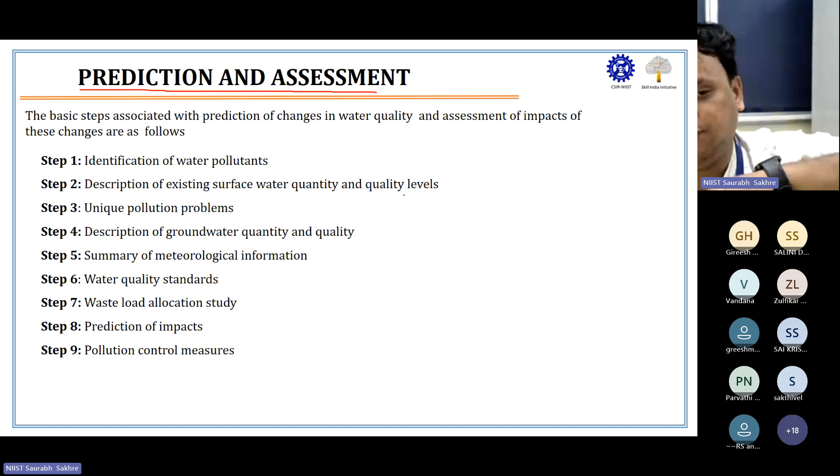We can do some other works also because the field is vast; there will be some other assessments and all. So you can ask me doubts, but what we can fulfill from this course is how much research or how much quantum of work is required to fulfill an EIA, and that is the theme of the course. So you can ask the doubt, you can mention it also, but what to expect from it is how this can be used to fulfill the environmental impact assessment report.

Similarly, like we have seen in air, there will be a series of steps. First, we need to identify the water pollutants, which will be emanated from the particular industry. Then we have to describe the existing surface water quantity and quality levels - if there is some lake or river nearby, we need to describe that. Then if some particular industry is there, we need to share that unique pollution problem also.

Let's say sometimes some e-waste recycling unit is there, so in that particular effluent there will be some metals related to integrated circuits and other things which may not be there in normal domestic wastewater. So like that we have to see.

Then we have to also describe the groundwater quantity and quality which will be required for the project. And in this case also we need to give a summary of meteorological information, because surface water and groundwater both are affected by rainfall in a certain year. So that we need to see.

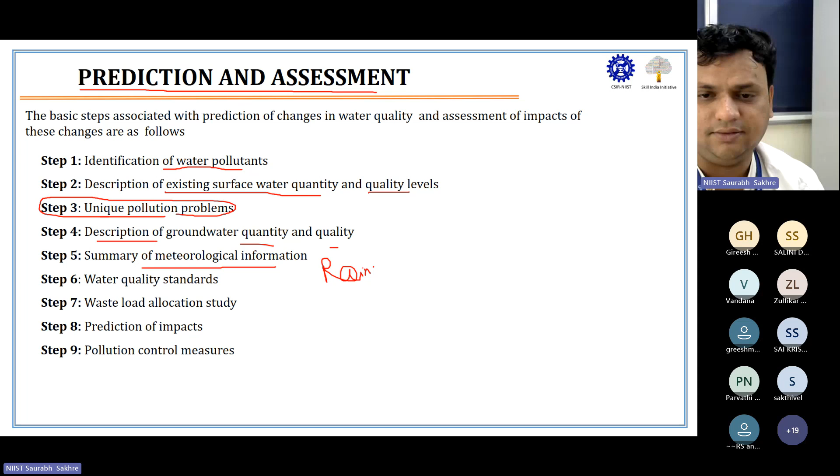Then again, like yesterday, we have to see the water quality standards, because one way or the other we have to compare it with the existing standard. Then once we know how much waste has been generated, we have to see the waste load allocation study. Waste load allocation means if X amount of waste is being generated from the industry, we have to think how much we are going to treat, and from the treated water, how much we are going to discharge in the river and how much we will recycle back. That comes from the waste load allocation study.

And finally, using mathematical models or other types of models, we will do prediction of impacts and give the pollution control measures. So these will be the 8 to 9 steps which we will be following for the water environment while carrying out EIA.

Now, first we'll start with the sources of water when we start any developmental activity. As we all know, broadly there are two sources only: surface water and groundwater. In surface water, we have lake, pond, river, stream, and some storage reservoirs like dam and other things. In groundwater, we have open wells, tube wells, artesian wells, springs, and infiltration galleries.

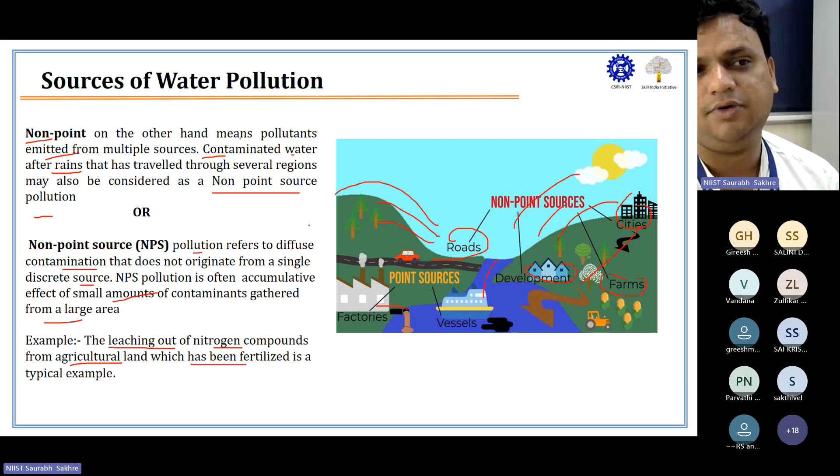One example I've given is that the leaching out of nitrogen compounds from agricultural land which has been fertilized is a typical example of a non-point source. So I hope point pollution sources and non-point pollution sources are clear to you.

Now one thing we need to understand is that unlike air, water has a very different type of pollutant. In air there are pollutants, no doubt, but if you understand 5 to 6 pollutants, you will be able to frame mitigation strategies and management measures. But in case of water, there are different kinds of things because usually it passes through the human body as well as through some kind of process. That's why the number of pollutants in water is more.

We'll start one by one. First one is infectious agents, like bacteria, viruses, protozoa, parasitic worms, etc. The source of this is human and animal waste - when water touches human and animal waste, it will impart infectious agents into the environment.

Second one is oxygen demanding waste. There will be some waste which will demand oxygen in the system, like organic debris and waste plus aerobic bacteria. The source of this is sewage, feedlots, paper mills, food processing, etc. These are some examples, but there are many sources. In typical wastewater engineering, oxygen demanding waste is usually characterized by BOD and COD. So this is the second category of water pollution.

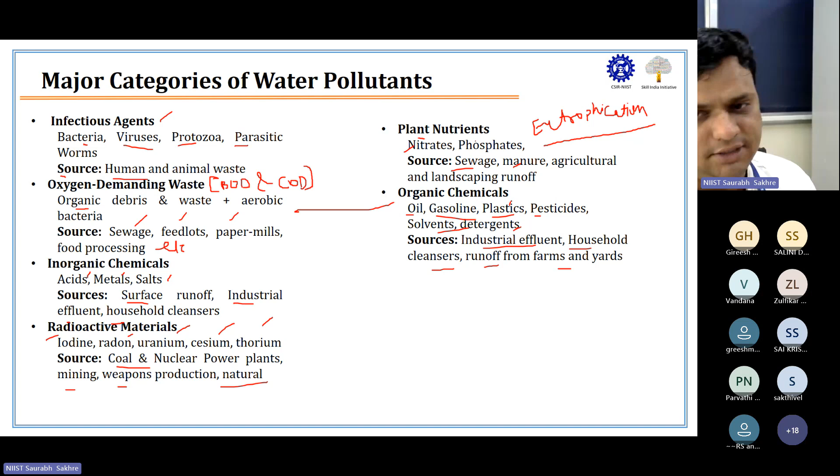Next is organic chemicals. These may also cause some oxygen demand, but differently. Sometimes there will be oils and grease, gasoline, plastics, pesticides, solvents, and detergent. Sources are industrial effluents, household cleansers, and runoff from farms and yards. When I say plastic here, don't assume normal plastic - it's like a polymer of plastic, which is organic in nature. Sometimes there will be eroded sediment from nearby land, like soil and silt, that also contributes to the pollution load in the river.

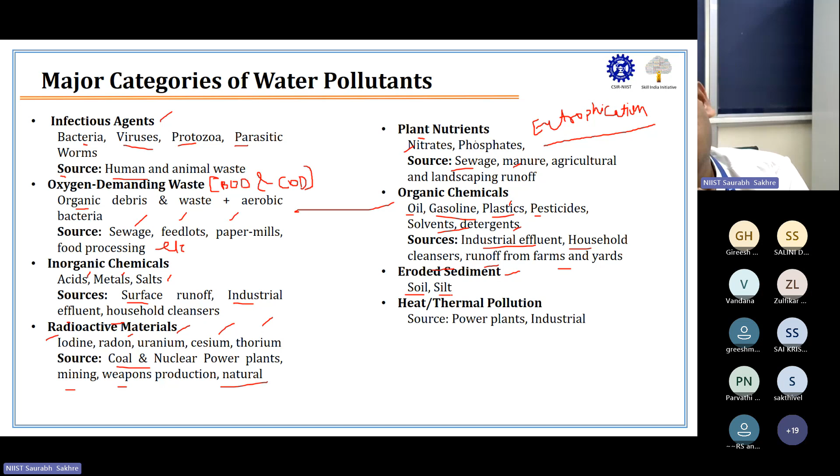Finally, there's heat and thermal pollution. We know that water, to be used properly, should have a temperature equal to the ambient temperature - cold in winter, hot in summer. But often, when a thermal power plant or processing industry nearby uses water in their cooling towers, the water they discharge has a temperature higher than the normal river. When they discharge that water into the nearby water body, it becomes difficult for aquatic life to sustain because of the increase in temperature and other pollution. That's why heat and thermal pollution is also a category of pollution, with sources being power plants and industries.

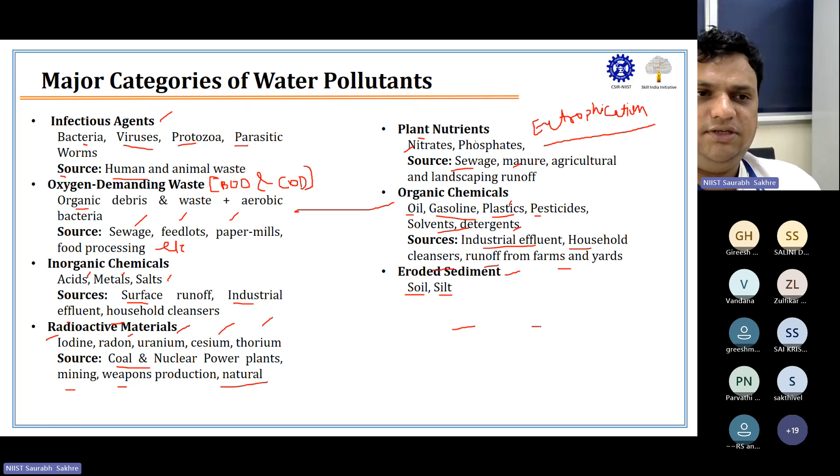So I hope all the categories of water pollution are crystal clear to you.

Now, when we say we have to generate baseline data for water, what exactly do we have to do? We'll see this one by one. First, we need to see the sources of water from where the industry will take their requirement and utilization, and how they will utilize it.

Second, we need to do a detailed water balance. Water balance means - let's say this is the industry, requiring X amount of water, and there are processes 1, 2, 3, 4. We need to see how much water each process requires - X1, X2, X3 - and then finally the output Y. So we need to see the detailed water balance of how much water each process requires.

Then we need to do the breakup of water requirement as per different activities. We have to say that process 1 requires X1 amount of water, process 2 requires X2 amount, process 3 requires X3, and so on.

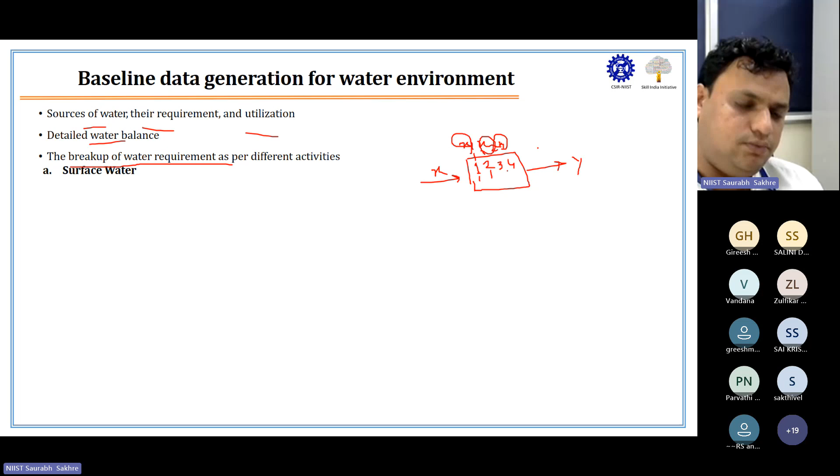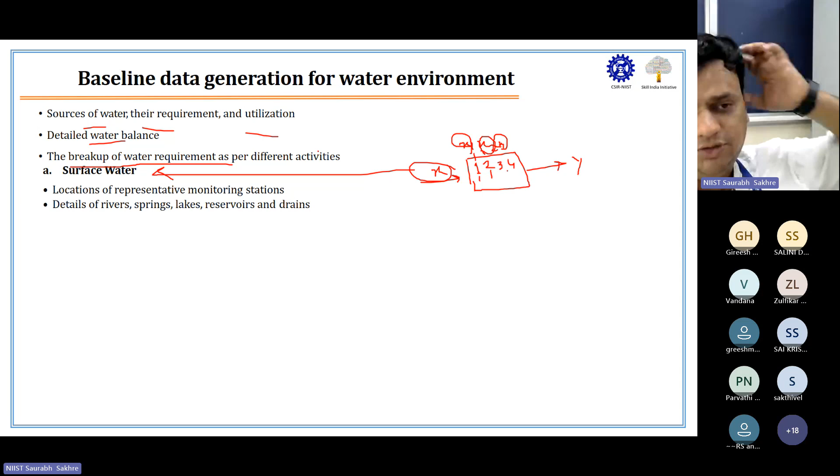Now that was one part. Out of that total X amount of water required, we also need to see how much is to be taken from surface water and how much from groundwater. If we are taking from surface water, we should know the locations of representative monitoring stations where we will monitor, and details of rivers, springs, lakes, reservoirs, and drains in the area - all those details we should know.

Then analysis of water quality parameters to assess water quality. At the same time, we need to delineate the watersheds and water drainage pattern so we can find out how the water will flow during heavy rainfall. Then surface water balance is also sometimes needed.

And we should also know the lean season flow of the nala from where water is drawn. Lean season flow is, when there is no rainfall, there will be some minimum flow - that is called lean season flow, from where the water is drawn.

Then if we need to take groundwater, we should see what the potential for groundwater is, how we will recharge it, and we should also do groundwater budgeting. At the same time, we should see the hydrogeology and aquifer characteristics of the area. Then again, we should see groundwater quality, groundwater potential, and groundwater table in the area - if the table is too low, we have to depend on surface water.

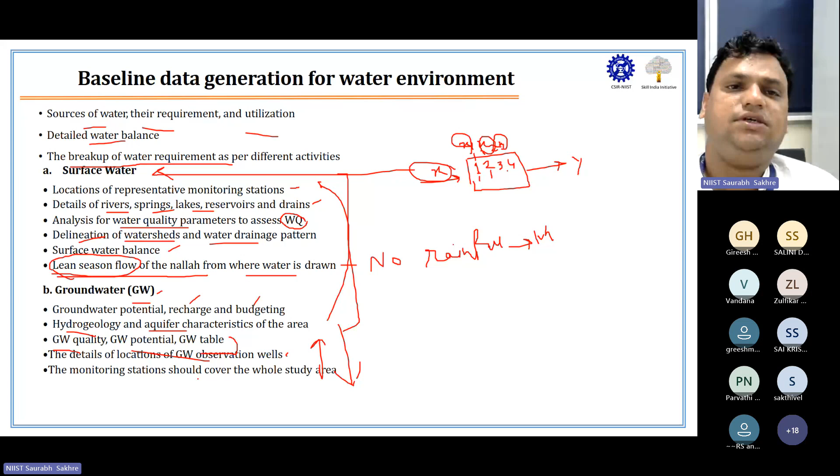If the table is high, I will balance some of the part from groundwater. So collectively, I have to use it. And of course, the details of the location of groundwater observation wells and the monitoring stations, whatever we are giving, should cover the whole study area. So these things we will see when we are generating baseline data.

Now, when we come to the quality of the water, we need to see what is our intent. If you are giving consultancy to some industry, or if you are preparing an EIA report for industry, you should know what is the intent of your treated water after treatment or whatever measures you are giving. Whether you would like to directly discharge into the river, or you want to use it for drinking, or for irrigation or anything. So for different sets of use, there are different pollutants which we should see.

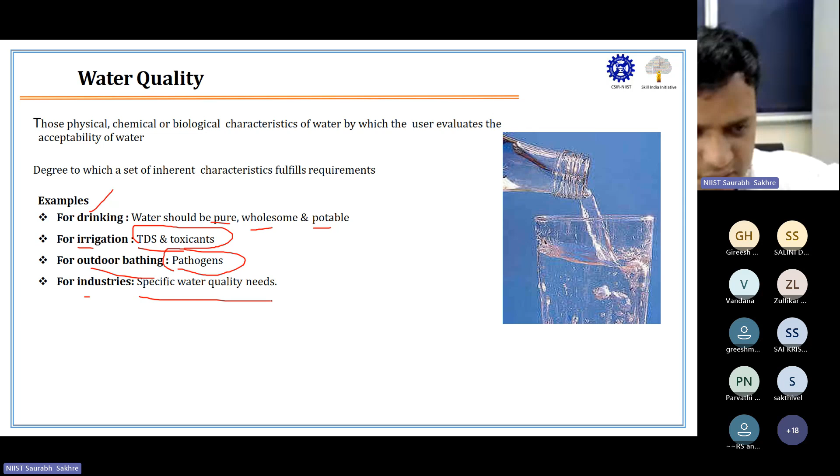Suppose you want to take the water for drinking, then water should be pure, wholesome, and potable. There is no doubt in that. If you want to use that water for irrigation, then TDS and toxicants should be in limit, total dissolved solids and toxicants. If you want to use it for outdoor bathing, then pathogens should not be there. Otherwise, taking a bath in it will lead to diseases. And if you are trying to supply it to industry, there will be some specific water quality needs, which we need to see.

Now, all those things I have shown you in the previous slide can be divided into these 4 or 5 things. First, particles, gases, organics, some ions, negatively charged or positively charged, and bacteria. So basically, all the contaminants in water can be characterized into these classes: particles, gases, organics, ions, and bacteria. So when you are preparing an EIA report, you have to separately say what you will do for the particles, gases, organics, ions, and bacteria.

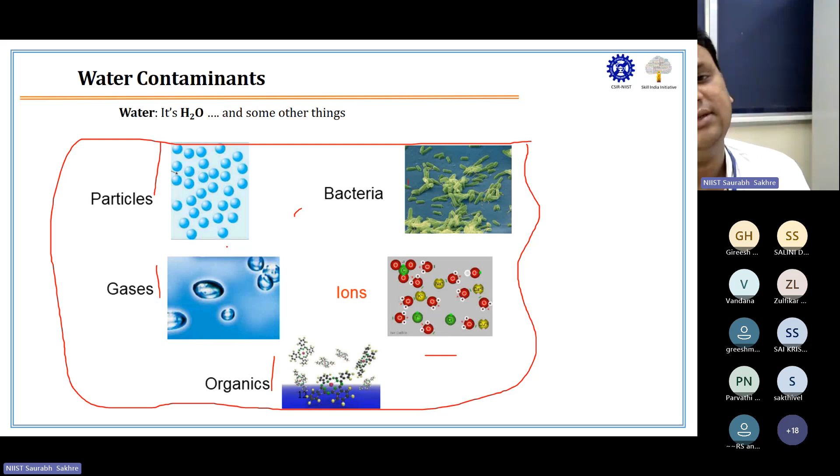And based on the type of industry, it is not necessary that gases and ions will be there. If there is no human involvement, bacteria may also not be there. But if human involvement is there, urination, defecation, all these things, then bacteria may also be there. So like that, you have to judge and see.

Now, when you do water analysis, we need to keep some important things in mind, some key factors. The first thing is that sampling should be proper. Then selection of parameters should be proper. At the same time, in doing all this, precision and accuracy have to be maintained. If you are taking a sample from one place to another, you have to do preservation also, and you have to report the values in proper form.

And at the same time, when you first take the sample, proper labeling has to be done, because many times you will do everything correct, but the labeling is wrong. So you are mentioning a particular water quality for a wrong sampling location. So when you are doing water quality analysis, you have to keep all these things in mind.

Now we'll see what a sample is and what types of samples we can take. When we hear this word sample, what comes to our mind? A sample is a part of the whole that can be examined to see what the rest is like. Suppose this is a river of length L. I cannot take the whole river for my analysis. So I will collect some water samples only. Let's say this is S1, S2, S3 and S4. These are called samples. A portion of the whole is called a sample. And sampling is to collect a small portion representing the water body, or a segment of the water body.

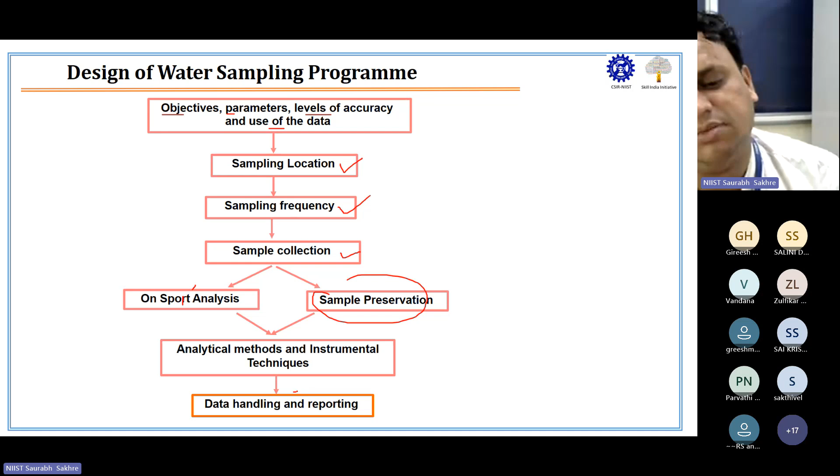Then analytical methods and instrumental techniques, what all are there we use. And lastly, data handling and reporting. So this is a proper water sampling program. When you are framing it, you have to see all these points one by one. Okay. Now we will see some of the important parameters which usually everyone sees in water quality modeling and monitoring, especially when you are doing EIA.

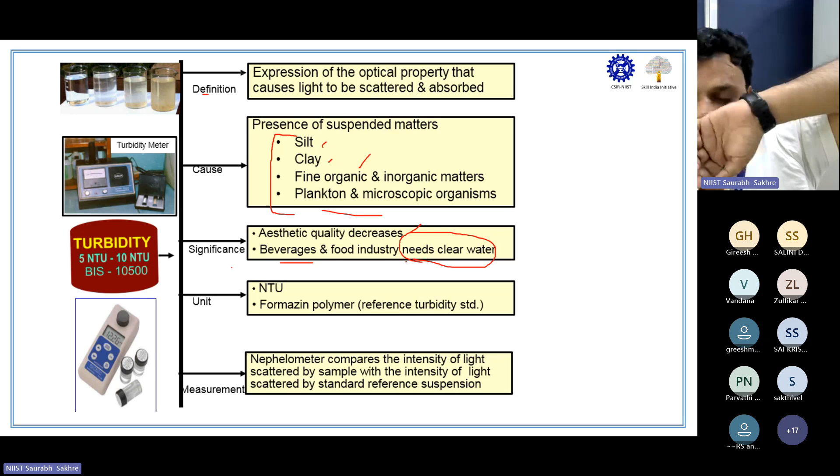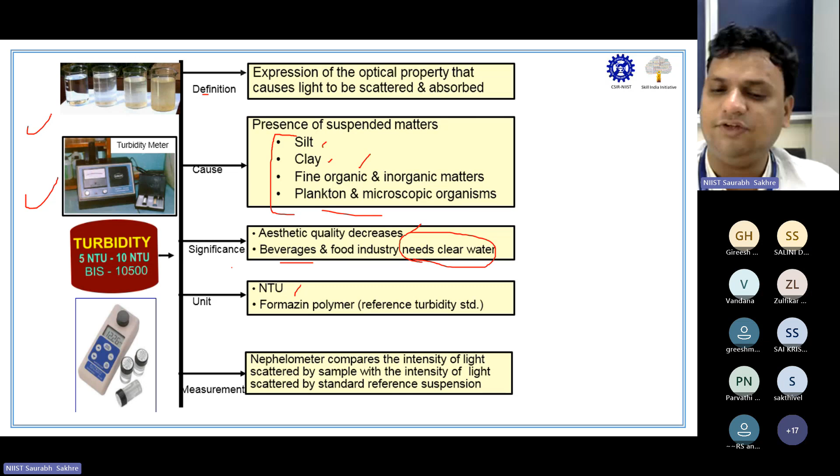Why it is important? Because it decreases the aesthetic quality of the water. And also, if you are selling this in a beverage or food industry, clear water is the only requirement. Okay. And we measure it in NTUs, nephelometric turbidity units, and Formazin polymer is used as a reference turbidity standard. There are some nephelometers which we use to find out the turbidity.

Second one is DO. It is called dissolved oxygen. And why it is required? Because dissolved oxygen is critical for survival of aquatic plants and animals. Okay. What is important is that it should be between 5 to 6 ppm. If it is not like that, then it will not be sufficient for most species. If it is less than 3 ppm, then it will be stressful to most aquatic species. And if it is less than 2 ppm, it will be fatal, sometimes deadly also. So some dissolved oxygen should always be there in the surface water.

Now, what are the factors affecting DO? Like plants and animal respiration, right? Decomposition of waste. If the waste is decomposed, it will require oxygen and it will suck it from the water. Then only it will decompose. That's why we say that don't discharge wastewater in the rivers. Then fresh water holds more oxygen than salt water, that we always know. And cold water holds more oxygen than warm water. Also, the greater the atmospheric pressure, the more will be the dissolved oxygen, because it will mix that. Okay, these are the factors which affect dissolved oxygen in a river system.

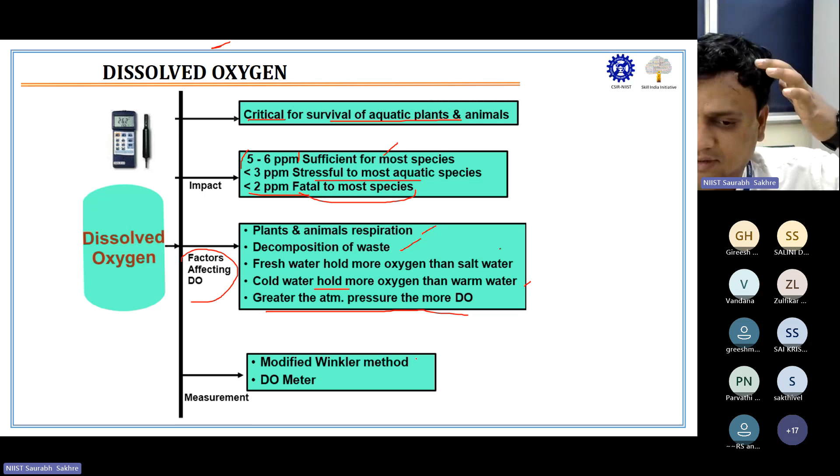Now, how do we do it? As far as the titration is concerned, the modified Winkler method is there. And nowadays probes are also there, sensor based probes which will measure the dissolved oxygen. But anyway, still till date, many scientists and academicians use the modified Winkler method because they consider it to be highly specific and accurate.

Second one is BOD. I already told you BOD is what? Biochemical oxygen demand. Okay, biochemical oxygen demand. So what is BOD? It is a bioassay test. It is a bio.

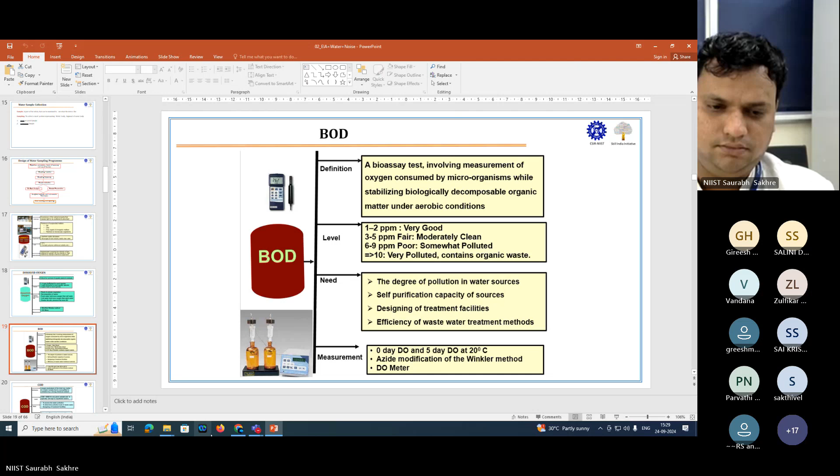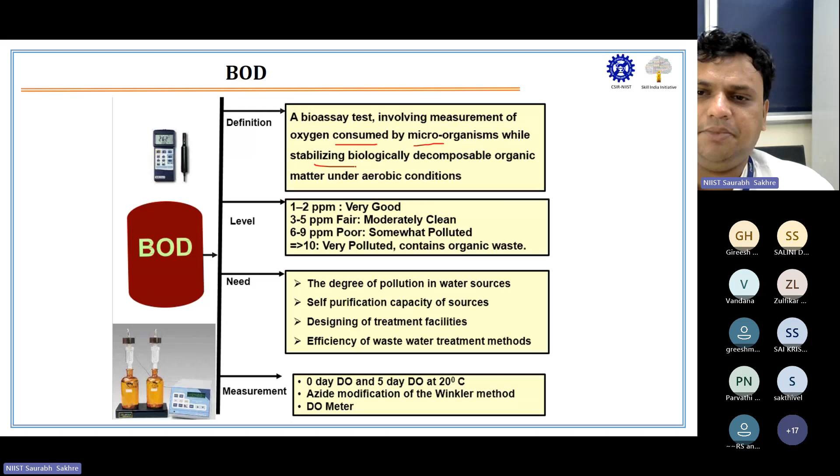So it is a bioassay test. It is a bioassay test involving measurement of oxygen consumed by microorganisms while stabilizing biologically decomposable organic matter under aerobic condition. So suppose some particular mass of waste is there in the river system, it will require oxygen to degrade and stabilize this biological matter. And when it requires oxygen, it will take from the river itself. So that oxygen demand is known as biochemical oxygen demand.

If the BOD is only between 1 to 2 ppm, it is very good. If it is 3 to 5, it is fair. If it is 6 to 9 ppm, it is somewhat polluted, and if it is greater than 10, we can categorize it as very polluted and containing organic waste. Now, why we need to do BOD? Because the degree of pollution in water sources can only be known using BOD. And BOD also gives us a measure of the self-purification capacity of sources.

Because in a river, if it is flowing and you are putting some waste, after a certain time, the river itself will purify the waste and convert it to simpler end compounds like CO2 and H2O. So for that also we require BOD to know whether it will be able to self-purify or not. And also, if you want to design treatment facilities, BOD is required. And if you have already built a wastewater treatment plant, you need to know the efficiency of your treatment method. That's why you will require BOD.

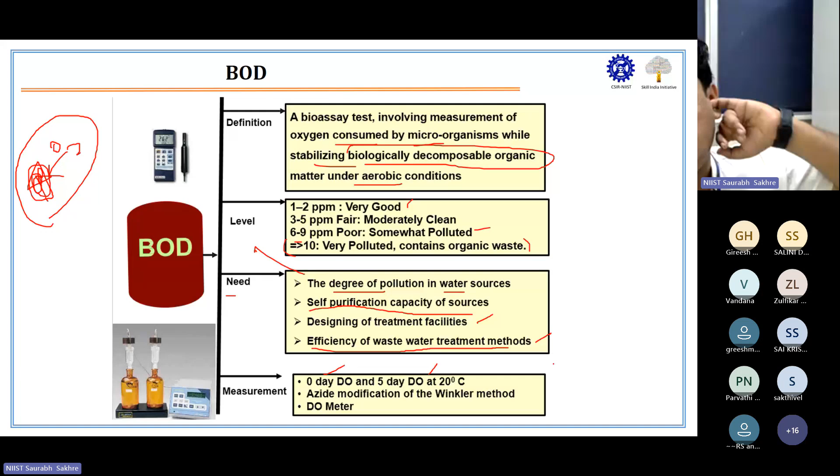And in this case also, usually we'll do 0-day DO and 5-day DO, and we will subtract the 5th day from the 0-day. And in this case also, the Winkler method is used. With that, we can work out the biochemical oxygen demand.

Now the second one is COD. This is also oxygen demand, but this is a chemical oxygen demand. And the important thing you need to keep in mind is that this demand comes only when there is oxidation by a strong chemical oxidant. So it is the oxygen equivalent of the total organic matter in a water sample that is susceptible to oxidation by a strong chemical oxidant. And always remember that COD will always be greater than the BOD for any given sample.

And even if it is unpolluted water, COD will be more than 20. Why? Because I am oxidizing inorganic matter also. Organic matter, as in BOD, and some inorganic matter like nitrates, phosphate, and other things I am also degrading. So in that case, COD will always be greater than the BOD. Now, why we do COD is because BOD always takes 5 days, but COD takes 2 hours only. That's why COD is a good measure of oxygen demand.

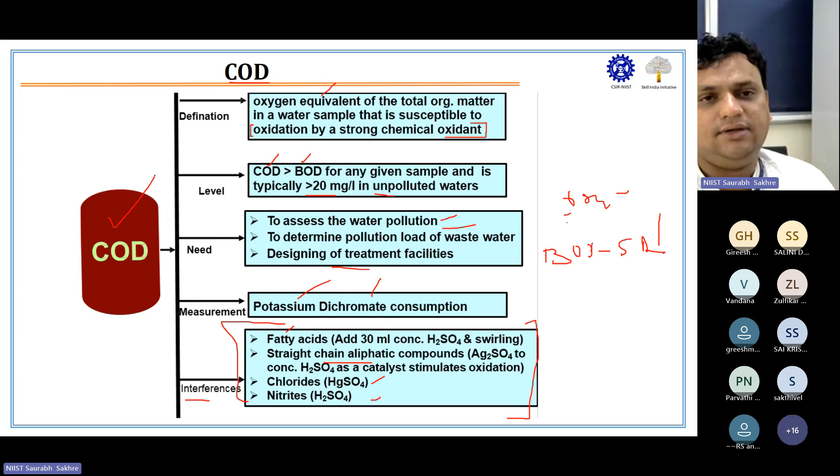And of course, we do it to assess water pollution, to determine the pollution load of wastewater and for designing our treatment facilities. Measurement we do using K2Cr2O7, potassium dichromate solution. And sometimes there may be some interferences in doing the experiments, like some fatty acids, straight-chain aliphatic compounds, chlorides and nitrites. So we need to see whether these interferences are there. If they are there, first we should remove the interferences, then only we should carry out the experiment for COD.

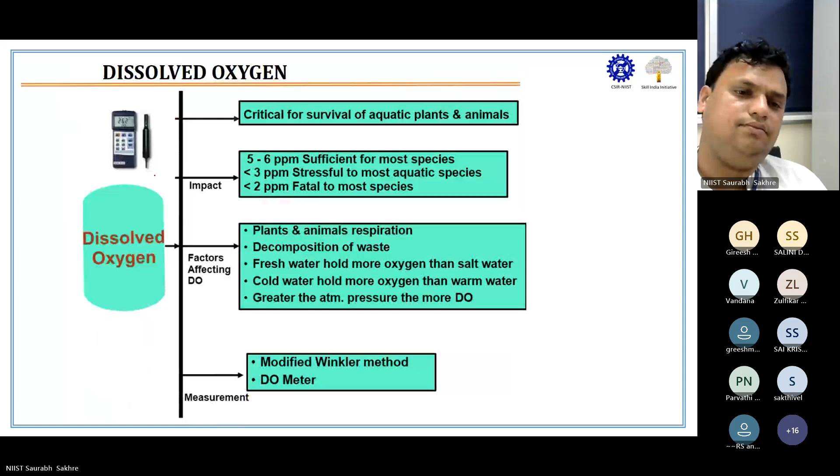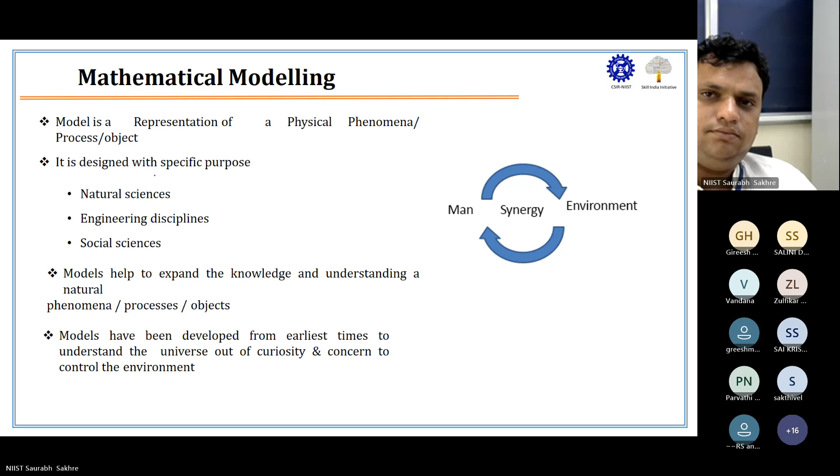Okay. Now up to this point, any doubt? Then only I'll proceed further. Does someone want to ask something? Anyone? Are you able to hear me? Or are you tired? I hope you are not tired by now. Greeshma KV, are you there? Yes, sir. So how is it going? This is almost the end of the second day, are you able to go parallelly with the instructors? Yes, sir. It's good. Can catch up with what the instructors are telling. Okay, then. So if there are no doubts, we will proceed with the modeling part.

Now up to this point, I have just given you a brief of what water quality is and what parameters we have to see. I have also briefed you on some very important water quality parameters like COD, BOD, turbidity, and DO. And now we will see the mathematical modeling of this part. Again, as I said, modeling like air quality modeling and water quality modeling are a whole different phenomena. But when you do it, you require remote sensing and GIS, which is the objective of our course.

So in that way, we will be only briefly touching these parts. So again, as you all know, what is modeling? Mathematical modeling. A model is a representation of a physical phenomena, process, or object. Because we cannot do it on a big scale, we will create a model out of it.

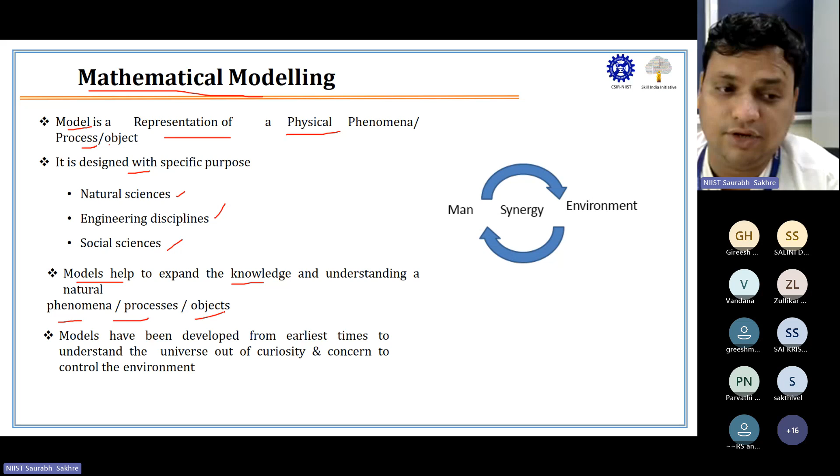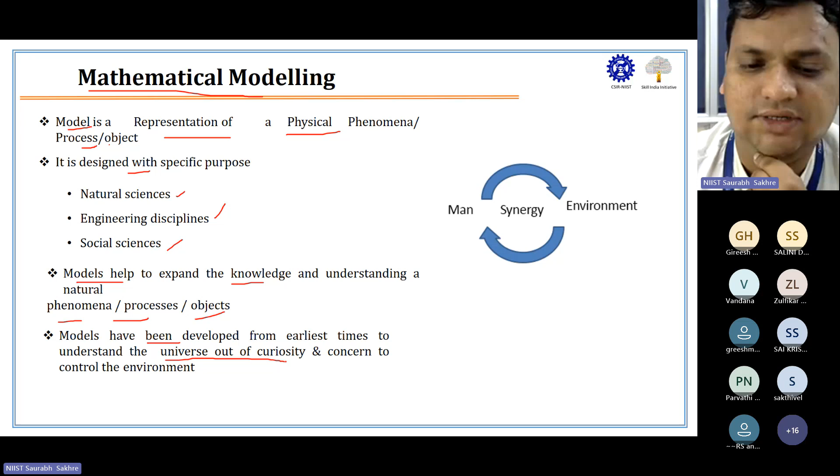I will show you in the case studies after half day of the fourth day and the whole fifth day. Then you will understand how remote sensing, GIS and models are clubbed together. And there are various models which we keep developing from earliest times to understand the universe out of our curiosity and concern to control the environment. Okay. Now, what types of models are available with us?

So the first one is of course the physical model, and in many cases where you create dams or a water body, mostly we will be creating a physical model, and we will scale it down. We will make a prototype and we'll try to see: if suppose this much water is being discharged, how it will go. So it may be scaled up or it may be scaled down, and it should look like a real world object or process, like models of a building, toys, laboratory, etc.

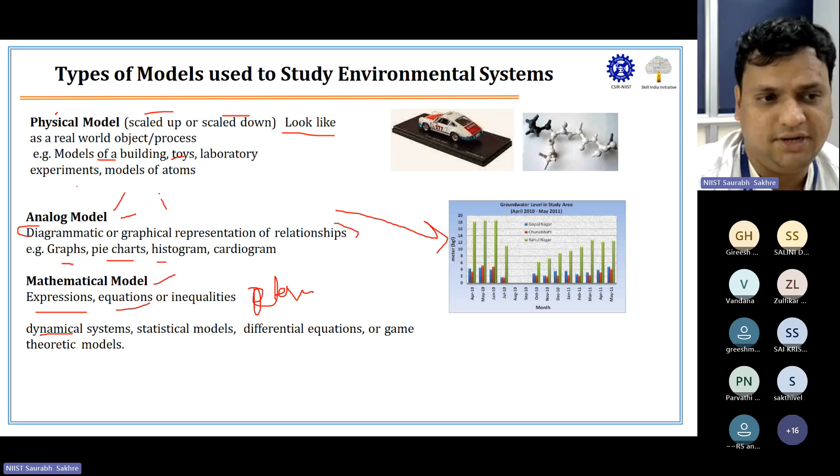Then comes analog models. It is solely based on graphs and statistics, like graphs, pie charts, histograms, and then we try to work out something from it statistically. Then comes mathematical models, which are expressions, two-dimension equations, three-dimension equations, which are very useful in understanding dynamical systems like rivers, etc. So mathematical models come under deterministic models, and analog models come under empirical models, that you need to understand.

Now, why should we have a mathematical model, or why should we do it? We all know that there is economic development, right? Population is growing like anything, and then there is pollution, solid waste pollution, river pollution also. So we need to evaluate the system and predict the impact of various activities on natural resources beforehand. Means I should not wait for the problem to occur.

I should proactively think and see how I can predict the problem now itself and make mitigation measures out of it. And that is what EIA is for. EIA is like we have to predict beforehand, right? Beforehand, we have to predict all the things. Now, let's see what types of models are available to carry out modeling activity for EIA.

So if you are doing data-driven modeling, ANOVA is there, analysis of variance, principal component analysis, factor analysis, differential analysis. AHP is also there, analytical hierarchy process, then multi-criteria decision making, MCDM, FAHP, support vector machines, SVDs, design of experiments, butterfly models, and chaos theory. These are all very higher level statistical terms, but you should know what all things can be used for doing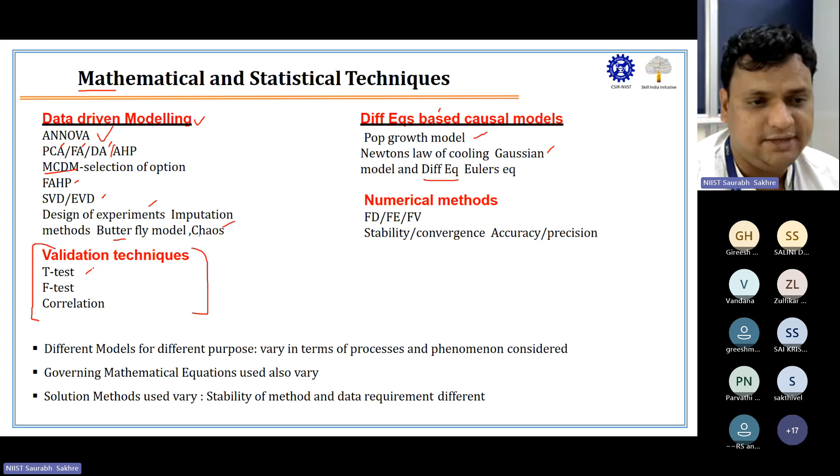mathematical and statistical modeling. Then we have differential equation based models like the population growth model, Newton's law of cooling, the Gaussian model and differential equations. At the same time, we have some statistical validation techniques like t-test, F-test, and correlation analysis. And also we have some numerical models, which I have shown in air pollution also, like Newton-Raphson and other kinds of things which keep on iterating until we get the required value. Okay.

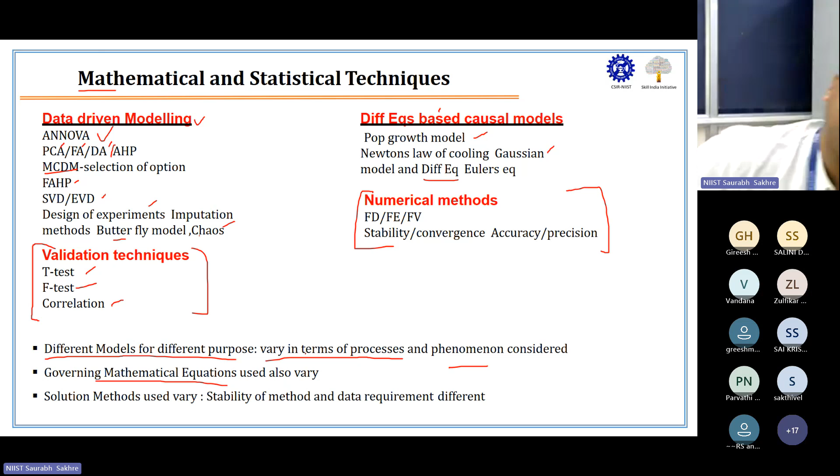So you have to keep in mind that there are different models for different purposes, right? They will vary in terms of processes and phenomena considered. And also the governing mathematical equation will vary, and which equation you will use in what. I'll show you one case study in which I did water quality modeling for EIA for Malad Creek and Manori Creek in Mumbai.

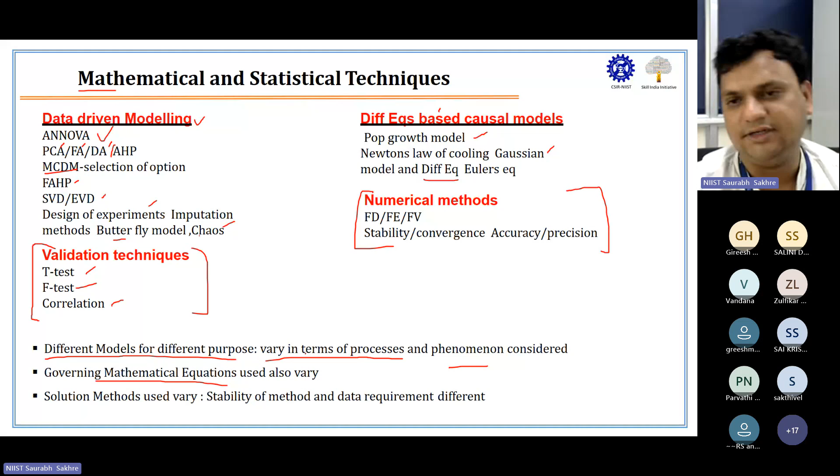There you will completely understand how mathematics, then the model, and then GIS are collectively applied, and a decision was made out of it. By that time, you can simply understand the terms and how it is going. Now, we have seen that there are different types of mathematical models, statistical models, and all other things.

Now we need to understand that there will not be any single parameter which will be used to declare water as good or bad. So what we have to do is an overall water quality modeling. Okay, it can be done parameter-wise also, but usually we require overall. So in this we use a mathematical formula to describe the spatial distribution of pollutants in a water body, and this is termed water quality modeling. And water flow is the fundamental cause of variability in water quality, that you have to always keep in mind.

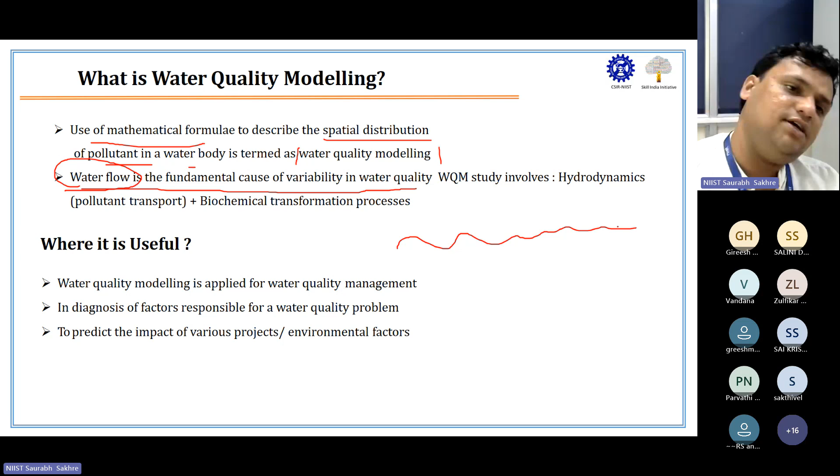If water is flowing, it will somehow clean itself always. If it is not flowing, then it will be a problem. Okay, so water flow is the fundamental cause of variability in water quality. And water quality modeling study involves hydrodynamics and pollutant transport plus biochemical transformation processes. It will change. BOD will change to some simpler compound, and at the same time some pollutant will be

transferred. And where it is useful: of course it is useful for water quality management, in diagnosis of factors responsible for water quality problems. Sometimes you don't know from where pollution is occurring, but if you apply a model, it will tell you that from a certain point, 10 kilometers or 5 kilometers before it, the values are more. That means someone is introducing that pollution there.

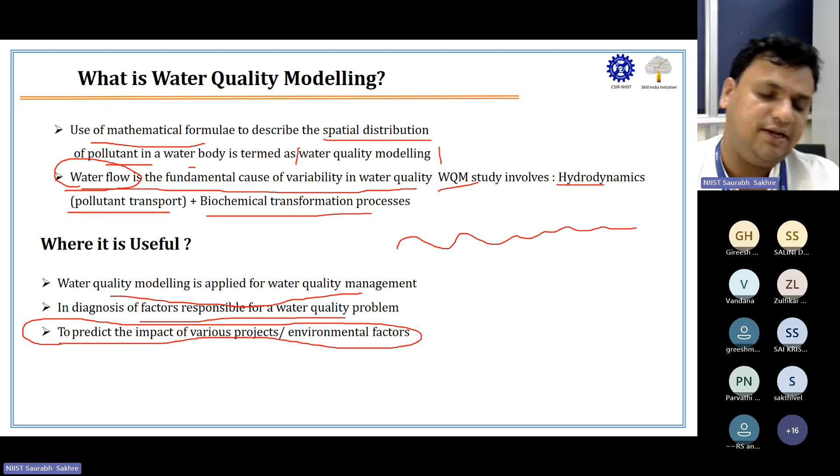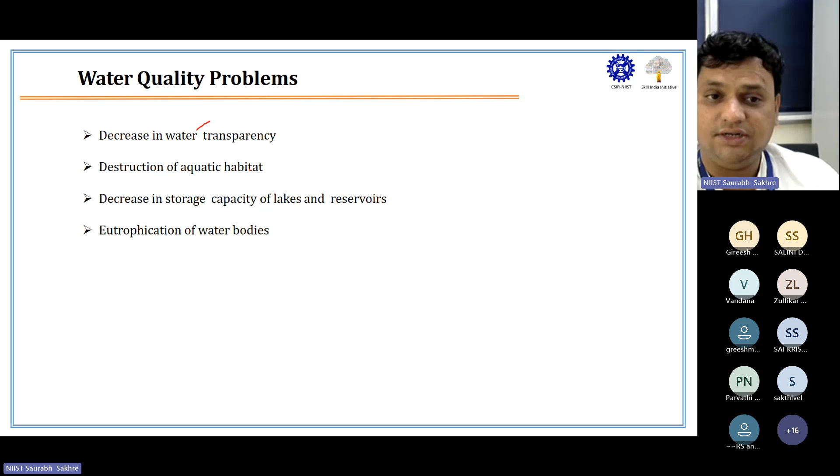And of course, one of the main objectives of EIA is to predict the impact of various projects and environmental factors for our developmental activity. Okay, now what are the water quality problems? When water quality modeling is to be done, you go to a river and you see that there is decrease in water transparency, destruction of aquatic habitat, decrease in storage capacity of lakes and reservoirs, eutrophication of water bodies. Just now I told you that there will be some unhindered or very exploitative growth of vegetation in the river.

Then concentration in the tissue of aquatic organisms like fish. There are researches going on which clearly say that nowadays whatever fish you are eating, some or the other pollutants are there. There are elevated levels of heavy metals in the fish, elevated levels of some other pollutants. So that pollution is ultimately going into the tissue of the fish, and that fish you are eating. Then death of aquatic organisms, and carcinogenic to humans. Of course, these are all cancer causing also.

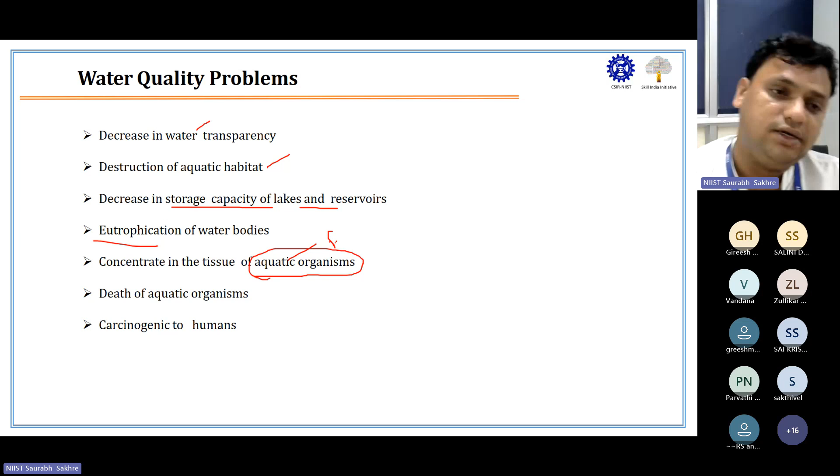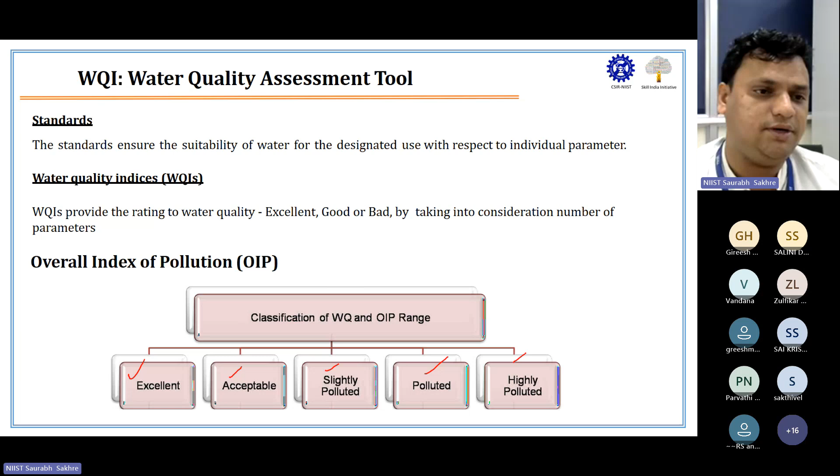Now, once you know all the things, you have to give an overall index of pollution. I told you earlier that based on one point only, you will not be able to make a decision. So you have to give an overall index of pollution, and you should be able to say whether my water quality is excellent, acceptable, slightly polluted or highly polluted. Based on that you have to calculate. And how we calculate it is similar to what we have done in air quality index.

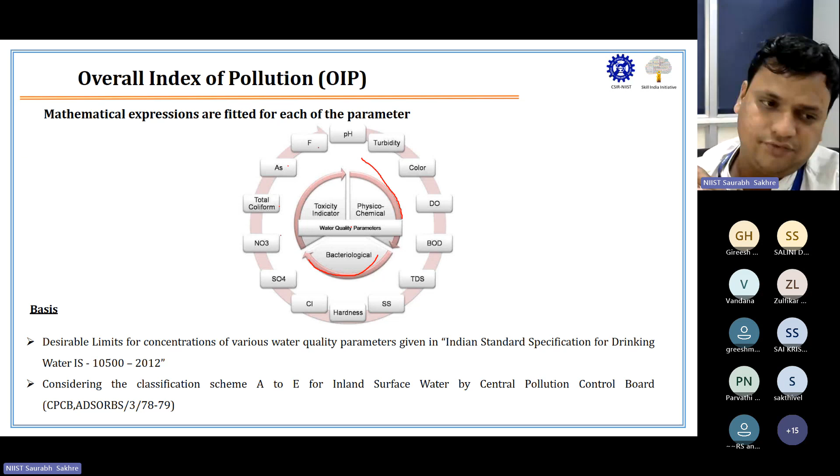We will have some toxicity parameters, like nitrate, total coliform, arsenic, iron, fluoride, etc. Then there are physico-chemical parameters, and some bacteriological parameters. We have to combine them and come to an OIP, overall index of pollution. Because if one parameter is good and another is not good, it will still not be workable for us. So in that way we have to give it.

Okay, now suppose I wish to do river water quality modeling, there will be 2 to 3 ways for it.

First, I should know the hydrodynamics of the water body. Hydrodynamics means it is completely related to flow—not to any chemical properties. When I'm talking about water quality, that's when I'm talking about the chemical properties.

In hydrodynamics, there will be 3D advective diffusion, 2D advective diffusion, and 1D transport. It will also lead to some tidal effects. When the river is flowing, there will be tidal effects, and if it is a coastal region, there will also be tidal effects like high tide line and low tide line.

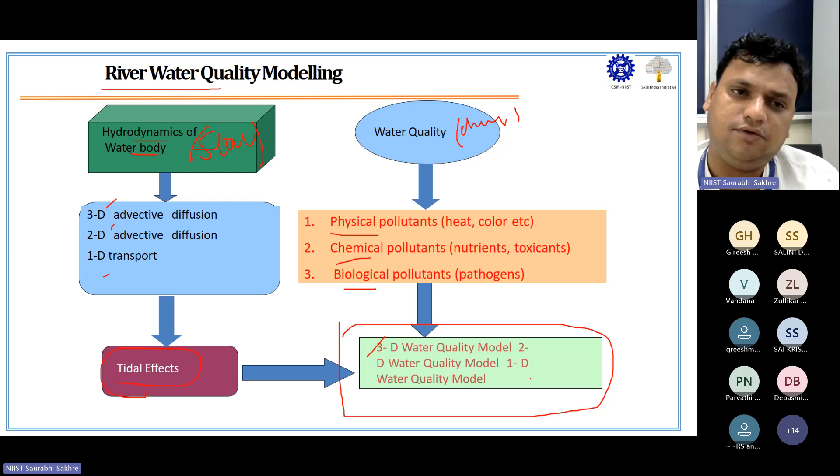In water quality also, there will be physical pollutants, chemical pollutants, and biological pollutants, which I have already shown. Based on the combination of these, we decide which model to use—whether 3D, 2D, or 1D water quality model—based on the intent of our use.

Earlier I showed you some models; now we will see specifics. If you want to use a data driven model, suppose to calculate WQI, there are dynamic OIP models—overall index of pollution models—developed by CPCB, SPCB. There are also multi-criteria decision making methods driven by fuzzy logic, mostly used for industry.

If you want to make a cause-effect relationship, which I mentioned yesterday in my Fundamentals of EIA class, you have to apply MIKE River Hydro. I have worked on this, and I'll show it to you in a subsequent slide. You have to use MIKE.

If you only want to model the nutrients in the system, you have to use NutriLGIS, developed by my alma mater NEERI, where I worked for three years from 2015 to 2018. Sometimes you can have a combination of both models, like RISK-PiNET, also developed by NEERI, which tells you whether the water is safe for drinking water supply. So you have to develop such models accordingly.

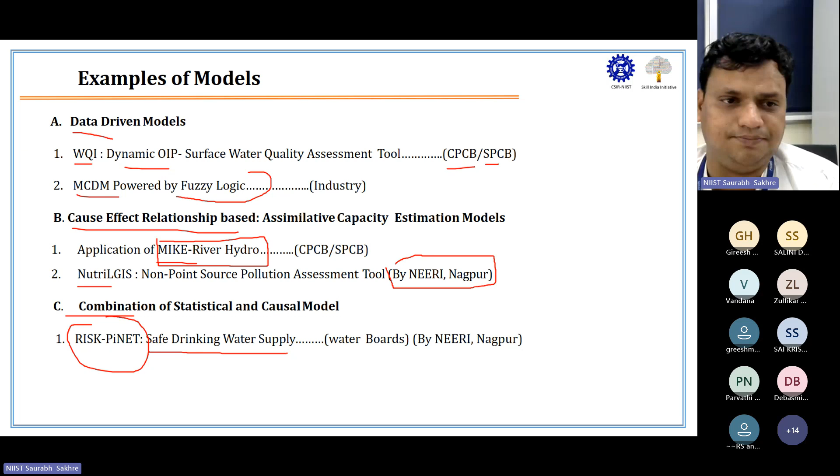I'll give you an interesting example of how modeling and mathematical modeling can help. This is the Parliament of UK, and this is the famous Thames River. There was oxidation of sewage creating a condition in the Thames estuary where the smell was so bad that Parliament and law courts had to be closed for some time.

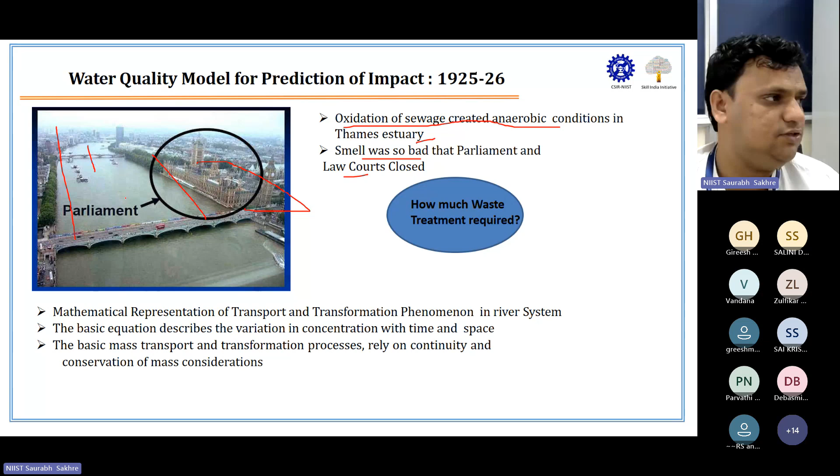After some time, scientists were contacted, and they modeled the whole river, working out that after a certain point, the river had to be given a treatment plan. Today, the Thames estuary and river are considered one of the cleanest rivers in the world. That's how modeling, combined with transport studies, helps create an environment suitable for all.

Now I would like to share one of the benchmark equations in water quality modeling, called the Streeter-Phelps equation, which people still use today—those from an environmental science background may know it. The Streeter-Phelps equation gives you a critical point, or a distance after which a particular mass of waste has converted to simpler end compounds. This equation is based on the assumption of steady flow, meaning it doesn't change with time, and uniform flow—both are assumptions in the model.

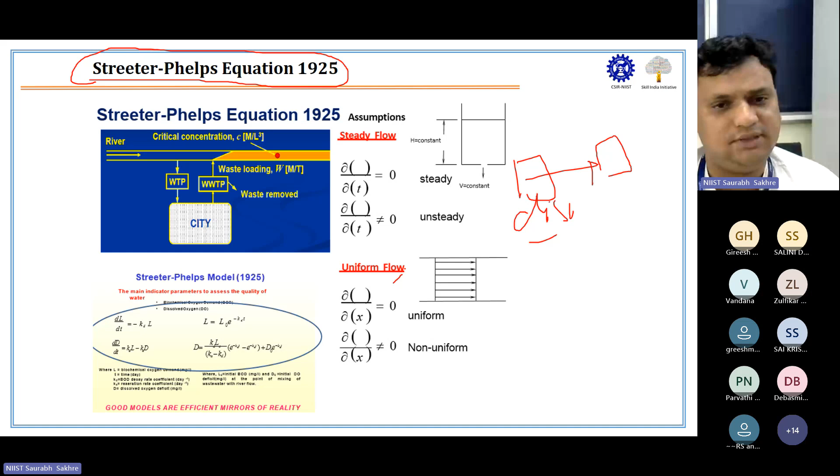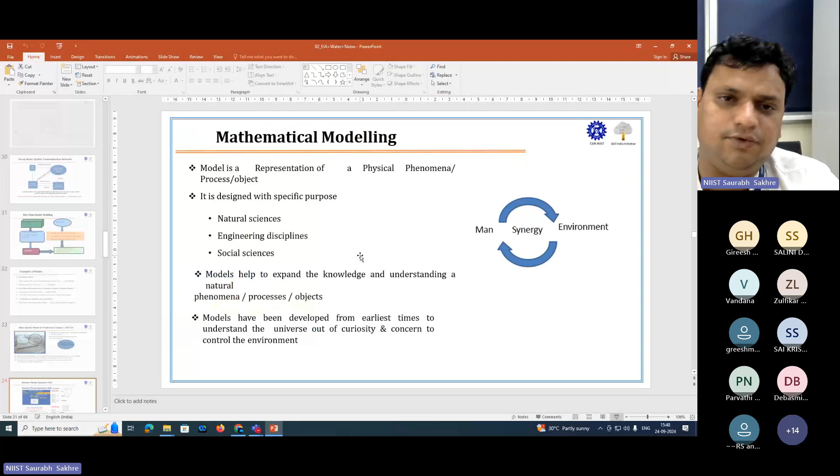With this, we have come to the end of the water environment topic. Noise will be covered tomorrow in the second half. If you have any questions or would like clarification, you can go ahead; otherwise, we will wind up for today.